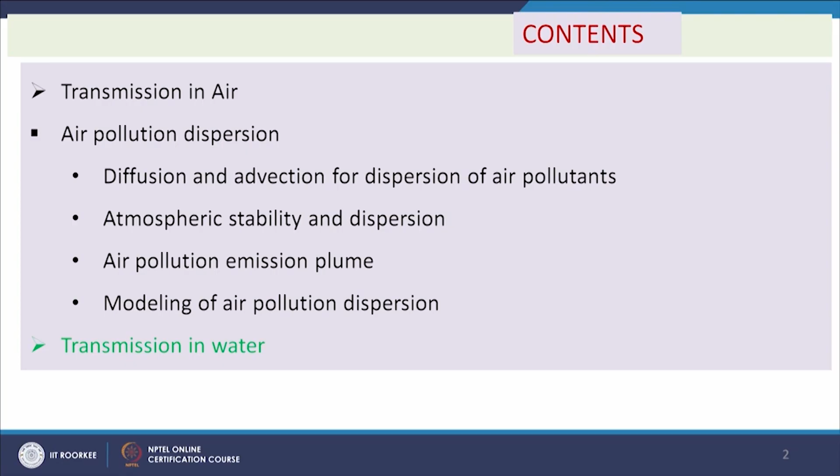So, we will be discussing now transmission in air and then air pollution dispersion: how the transmission is taking place, how the dispersion of the pollution is taking place, how the pollution is moving from one place to another in the atmosphere. Then diffusion and advection, the two major mechanisms for dispersion of air pollutants. We will also see that this process is influenced by the stability of the environment, so we will also discuss atmospheric stability and dispersion.

And air pollution emission plume. When emission enters the atmosphere through a stack, from a chimney say, how will this go downstream? Whether the plume will go up or whether it will come down. If it goes up, then there is no risk, but if it comes down, then it will be risky, and people will be more affected. So, the different types of plumes we will discuss, and modeling of air pollution dispersion.

We want to predict, say here we have an industry and pollution is generated. After 1 kilometer or 5 kilometers, what will be the concentration of pollutants in the atmosphere at a certain height? So, that we can measure. And transmission in water we will discuss in the next class.

So, we have seen that dispersion of air pollutants can take place through diffusion and advection. What is diffusion? Diffusion means pollutants are moving from one place to another due to the difference in concentration. So, the concentration gradient is the driving force for this transfer, and in case of advection the flow of wind is helping the transfer of the pollutants from one place to another. So, diffusion is movement due to concentration gradient, and advection is movement due to bulk motion of air.

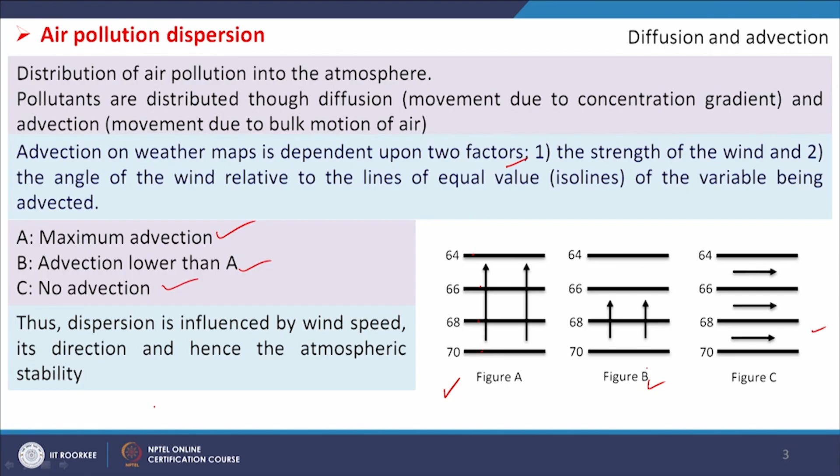So, it is clear that wind speed and wind direction will influence the mixing of the different layers of the atmosphere across the height. That is the advection we are talking about, and the dispersion is influenced by the wind speed, its direction, and hence the atmospheric stability, where stability is that which resists the upward flow. Atmospheric stability is a measure of the atmosphere's tendency to discourage or deter vertical motion, and vertical motion is directly correlated to different types of weather systems and their severity.

Okay. So, wind velocity, temperature, turbulence, humidity, rainfall etcetera influence atmospheric stability. As a result, it also influences the dispersion of pollutants. Pollutant dispersion is also influenced by the stability conditions of the atmosphere. So, there are three types of stability conditions: unstable, stable, or neutral.

So, an unstable atmosphere will enhance or encourage the vertical movement of air. So, if vertical movement is encouraged, it is unstable. A stable atmosphere will suppress the vertical motion, or it will resist the vertical motion, and a neutral atmosphere will neither suppress nor enhance vertical motion. So, these are three different atmospheric stability conditions we can get.

Now, if we assume that an air parcel is going up, okay, its inside condition is different from the outside. It may be possible that inside is becoming less cooler with height, but the outside environment is becoming more cooler. So, that is lapse rate. If we go up, temperature will decrease with the height. So, that is lapse rate. When we consider the lapse rate for the actual environment, that is environmental lapse rate,

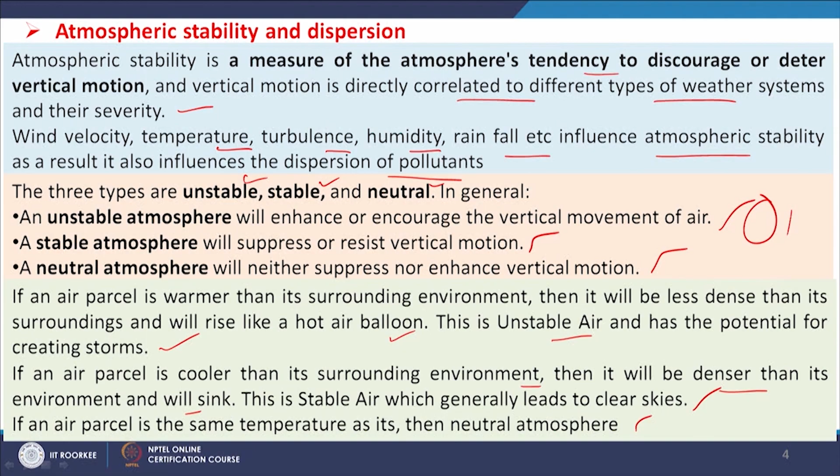And this is stable air, which generally leads to clear skies, and if an air parcel is the same temperature as its surroundings, then we get a neutral atmosphere. So, if the air parcel and outside environment both have the same lapse rate, then we will get the neutral condition. So, stability is dependent upon the dry and saturated adiabatic lapse rates and the environmental lapse rate. So, one is environmental lapse rate, another is adiabatic lapse rate.

So, adiabatic lapse rate means a balloon or parcel which is going up, we are considering it will not take any heat from the outside when it goes up. Now, that is adiabatic expansion or contraction, whatever may take place, but it will be happening in adiabatic condition. Now, the air may be dry or may be wet. So, depending upon the dry and wet conditions, we will be getting dry and saturated adiabatic lapse rates.

So, environmental lapse rate is the rate at which air temperature changes with height in the atmosphere surrounding a cloud or rising parcel of air. The overall average rate is a decrease of about 6.5 degree centigrade per kilometer, where the lapse rate of temperature is negative. As you know, as we go up, the temperature reduces, that is why negative lapse rate, and inversion is said to exist where the lapse rate of temperature is negative, that is, temperature increases with height.

The word adiabatic means that no outside heat is involved in the warming or cooling of the air parcels, as we have discussed, and dry air cools at about 10 degree centigrade per kilometer. That is the dry adiabatic lapse rate, while moist air usually cools at less than 6 degree centigrade per kilometer, that is the moist adiabatic lapse rate. So, these are the two adiabatic lapse rates we have.

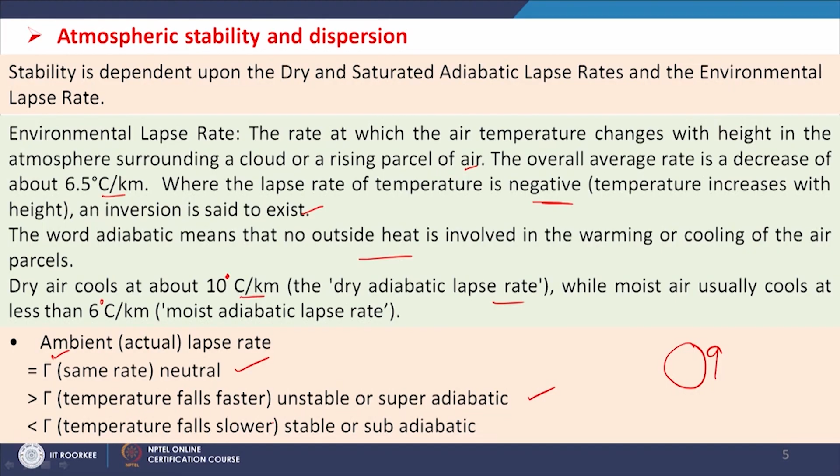Now, if the ambient lapse rate is equal to the dry adiabatic lapse rate, then it is neutral. If the ambient lapse rate is greater than the dry adiabatic lapse rate, temperature falls faster, and it is unstable or super adiabatic, and if the ambient lapse rate is less than the dry adiabatic lapse rate, it is a stable or subadiabatic condition. So, these are the different conditions by which we can quantify the environmental stability.

And because of these different stability conditions, when the gas comes out from a stack, it is dispersed in different fashions. We can get coning, looping, fanning, fumigation, and lofting.

So, what is happening in case of coning? Here this dotted line is our dry adiabatic lapse rate and the solid line is your environmental lapse rate. Both are parallel, that means the environmental lapse rate is equal to the dry adiabatic lapse rate. So there will be a neutral environment. When pollution is emitted from this stack, it will not go up nor go down. It will be uniformly distributed both ways about the center. So this is a coning type of plume, which we get when a neutral atmosphere is there.

But here the dotted line is our adiabatic lapse rate and this is our environmental lapse rate. If we consider a certain height, from 0 to this height, for the same Z we are getting more del T in case of the actual lapse rate. So del T by del Z, that is the lapse rate, is more.

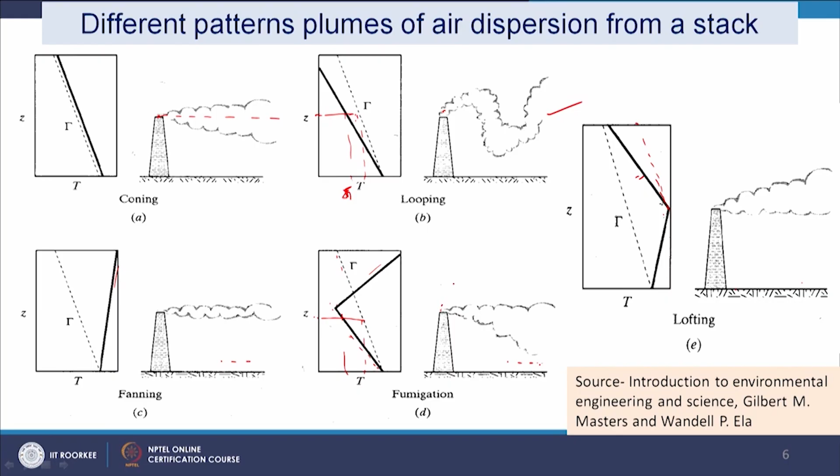Now, we will see how to model this dispersion process. The point source Gaussian plume model is mostly used. There are many approaches; people have tried to develop models to predict the concentration of pollutants at a certain distance downstream of the wind from the location of the emission. The Gaussian model is perhaps the oldest and perhaps the most commonly used model type.

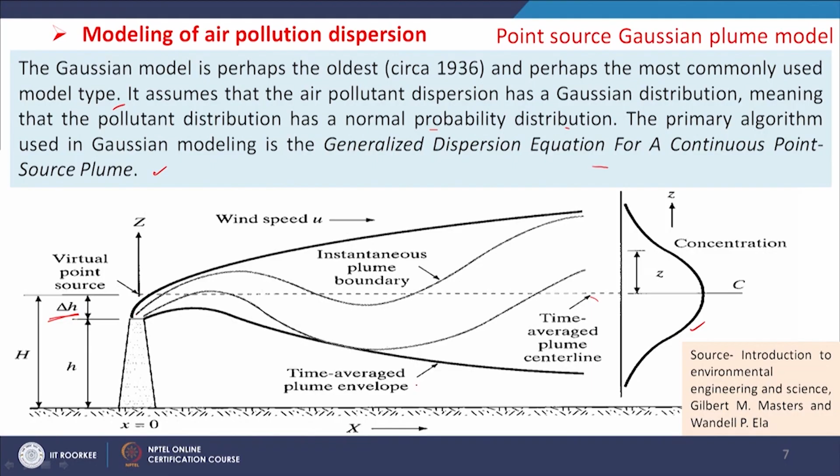This is a virtual point source and this is the center point of it, and then this is the instantaneous plume boundary, and this is wind speed, and this is the time averaged plume center line, and this is the time averaged plume envelope. So, these are the different parts to describe this Gaussian plume model. It can have x, y and z directions.

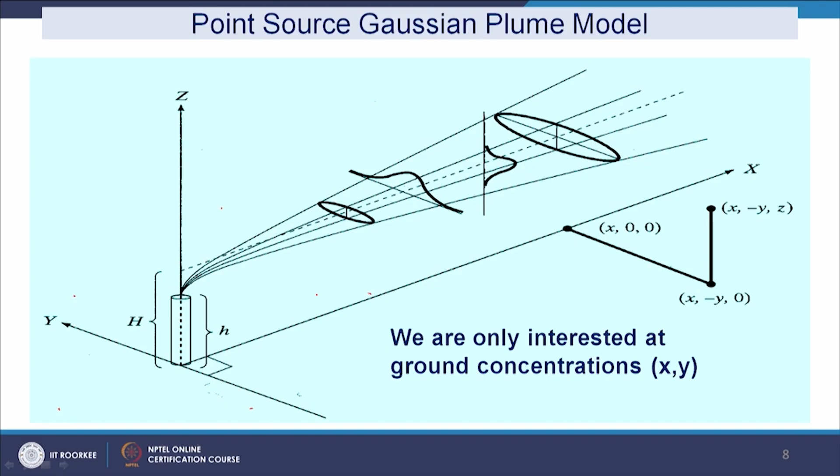We are only interested in ground concentrations, as people are here at the ground. So, if this is the point, maybe here, maybe here, anywhere the people may be. At that position x, y will change, and z we are not concerned with, because pollutants have to be available at the ground to make an impact on human health.

So, model structure and assumptions. Some assumptions are there for this: pollutants are released from a virtual point source, so that it is easy to identify, and there is a constant emission rate, not changing with time. Advective transport is by wind, and dispersive transport, that is spreading, follows normal, that is Gaussian, distributions away from the trajectory, and wind speed is constant with time and elevation.

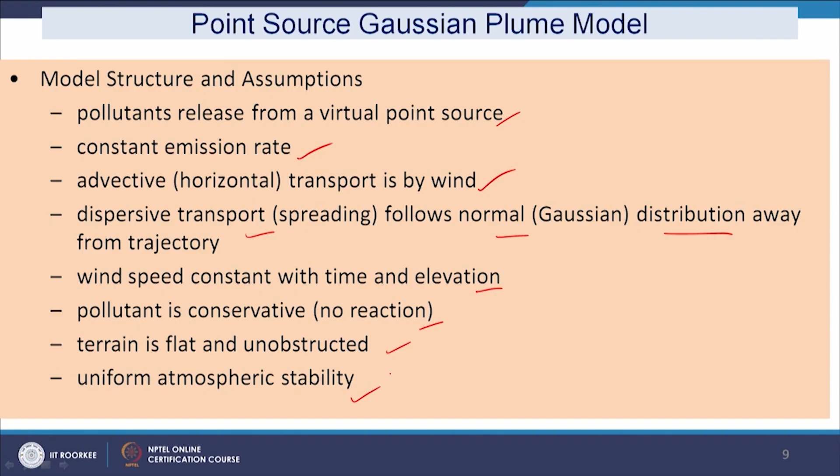The pollutant is conservative, non reactive; it is not that the pollutant is present now but after some time it will be converted to another form. We are assuming that pollutants are conservative in nature, the terrain is flat and unobstructed, and there is uniform atmospheric stability, not changing from place to place. These are the major assumptions on the basis of which the expressions have been developed.

The expression is like this: concentration at x, y position is equal to E by pi sy sz u, exponential minus half (y by sy) squared, into exponential minus half (H by sz) squared. In this expression C is the concentration at ground level at point x, y, E is the emission rate of pollutant in gram per second, sy and sz are plume dispersion standard deviations in horizontal and vertical directions respectively in meter, and U is wind speed at stack effective height.

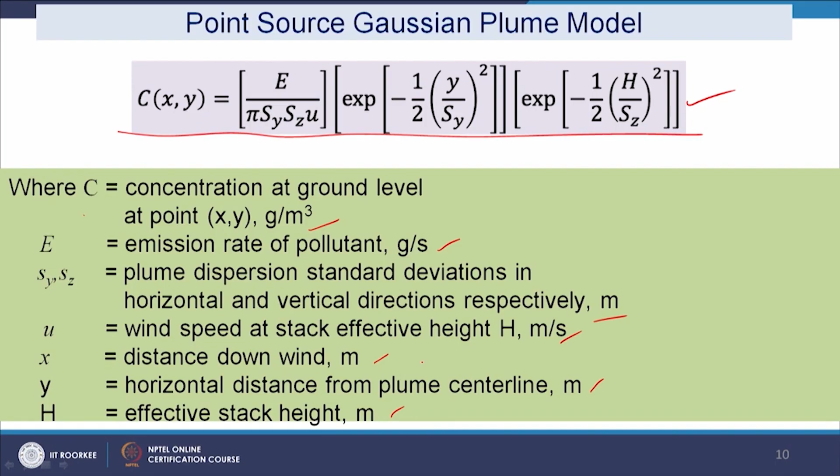At capital H, in meter per second, and x is distance downwind in meter, y is horizontal distance from plume center line in meter, and H is effective stack height in meter. These are empirical relationships, so we need to use the formula in the same units only. And to find the effective stack height, capital H is equal to small h plus del h, as we have seen in the previous slide. Here H is the effective stack height, h is the height of the physical stack and del h is the plume rise.

Holland's formula: how can we determine this del h, the plume rise? Del h is equal to Vs d by u, multiplied by 1.5 plus 2.68 into 10 to the minus 2 into P into (Ts minus Ta) by Ta into d. In this expression del h is the plume rise in meter, Vs is the stack flue gas velocity in meter per second, and d is the stack diameter at exit in meter.

U is the wind speed at the stack height and P is the pressure in kilopascal. If kilopascal, then this 10 to the minus 2 constant will be there. Ts is the stack flue gas temperature in K, and Ta is the ambient air temperature in K. So, stack temperature and ambient air temperature are Ts and Ta respectively.

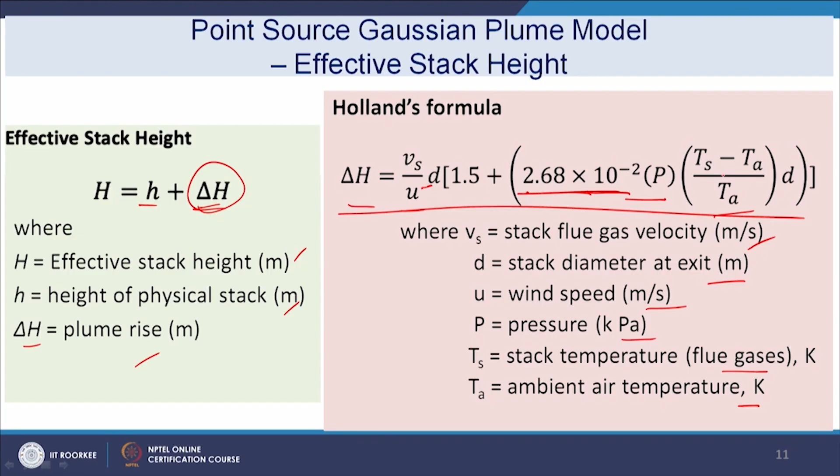So, these are the expressions to calculate the del H value. Now, the stability conditions may be of different types, and we have seen that people have worked on this area and the information is available.

So, A is extremely unstable, B is moderately unstable, C slightly unstable, D neutral, E slightly stable and F moderately stable. So, these are the different conditions which are defined, and from these stability conditions we can get the value of S y and S z, which are available in literature, as many people have worked on it and these have been accepted for applications.

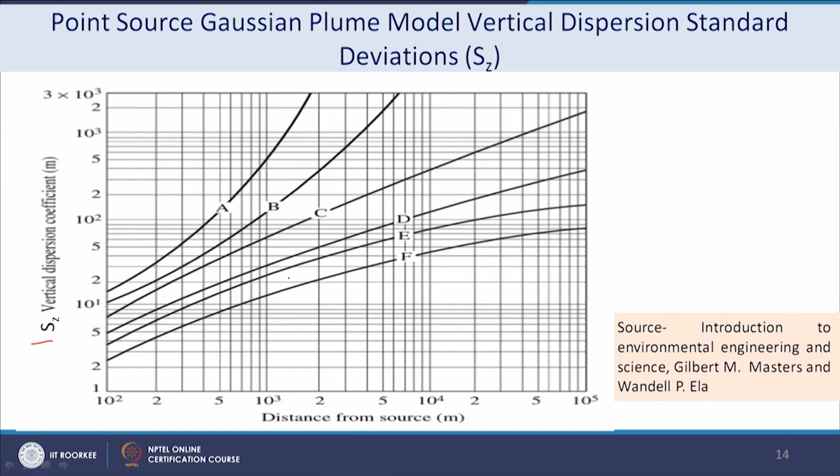So, for some distance from source, if we know the stability condition for that particular case, we will get the value of S y. Similarly, we can get the value of S z if we know the stability condition from this graph. So, these graphs are already developed by many researchers and are available for our application.

And wind speed, I told you, is at stack height, and in the table we defined u at 10 meter height. So, we have to convert it to stack height. So, u 2 is equal to u 1 into z 2 by z 1 to the power p. This is the expression used to calculate the wind speed at stack height. At 10 meter height we know it, but at stack height it will be determined by this formula, and in this case the p value will depend on the stability conditions.

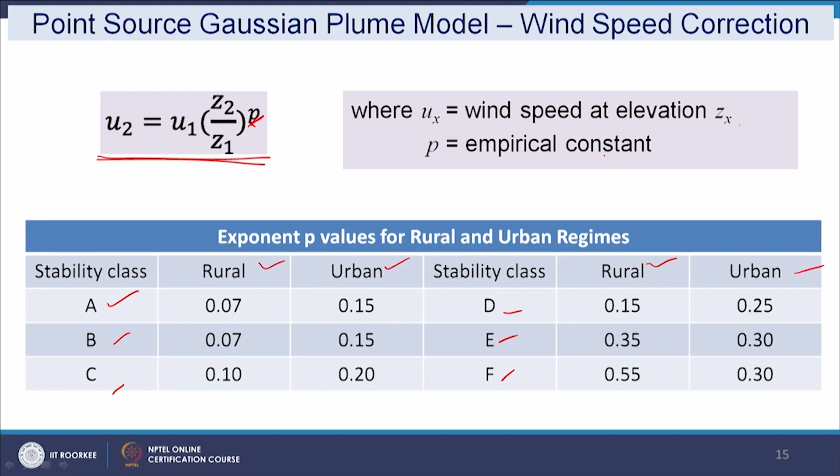If we see here, we have stability class A, B, C, D, E, F and it may be rural area or urban area. So, depending upon this area, these values are defined; on the basis of experience these p values have been recommended for prediction, that is wind speed correction. And here u x, that is u 1, u 2 you have shown. So, u x in general terms is wind speed at elevation z x and p is the empirical constant. This p will be used to determine the value of u 2.

Now, for example, a stack in an urban area is emitting 80 gram per second of NO. It has an effective stack height of 100 meter. The wind speed is 4 meter per second at 10 meter. It is a clear summer day with the sun nearly overhead. Estimate the ground level concentration at 2 kilometer downwind on the center line and 2 kilometer downwind 0.1 kilometer off the center line. So, x and y values are given in case 2, and in case 1 no y value is given.

So, what will be the first step? We have to determine the stability class. So, how can we determine the stability class? For that, I have shown you a table where the wind speed at 10 meter height is important. In our case 4 meter per second at 10 meter height is given. So, we will consider the wind speed is 4 meter per second at ground surface. It is a clear summer day with sun nearly overhead, that means daytime and strong sunshine.

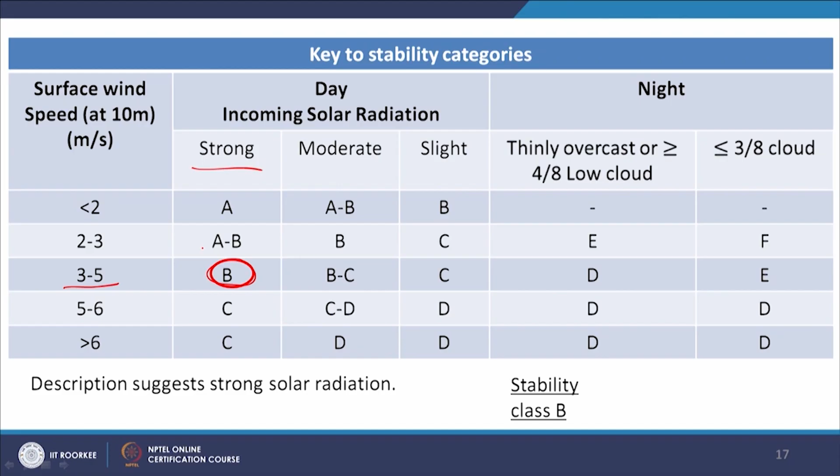So, if we see this table, 4 meter per second falls in 3 to 5, and we have strong solar radiation, because it is the middle of the day and a clear day. So, this will be B type of stability, and if it is B type of stability, then what will be our job? Our job will be to find out the value of p. So, for p we have another table we have discussed.

So, in this case we are having B. So, B will be having P equal to 0.15. So, in this case if we put this value to get the value of wind speed at our stack height, then U2 will be U1 into Z2 by Z1 to the power P, where U1 is 4 and Z2 is how much? It is given 100 meter effective stack height. So, we do not need to calculate the effective stack height, it is already given: physical stack height plus plume rise. So, that is given as 100 meter.

So, we do not need that formula to determine the value of del H and then add it with h to get H equal to small h plus del H; that is not needed. So, we are directly getting the value of P, and then we will be putting this P value here. Z2 value is given 100 and this is 10, to the power 0.15. So, it is becoming 5.65 meter per second. So, this is the wind speed.

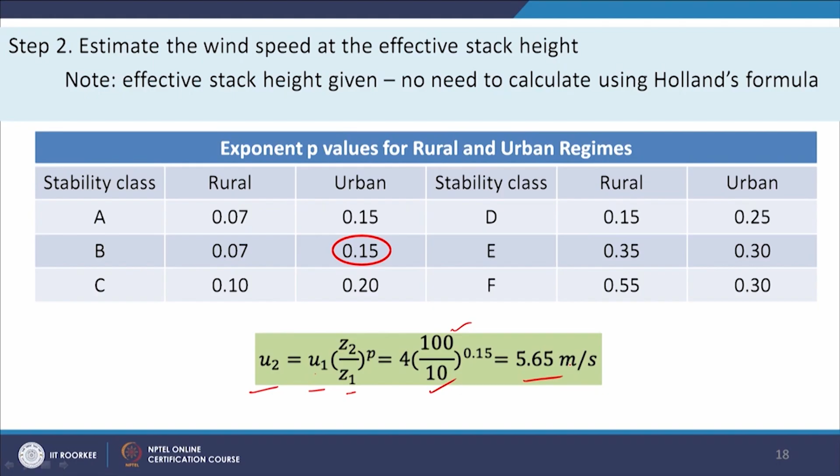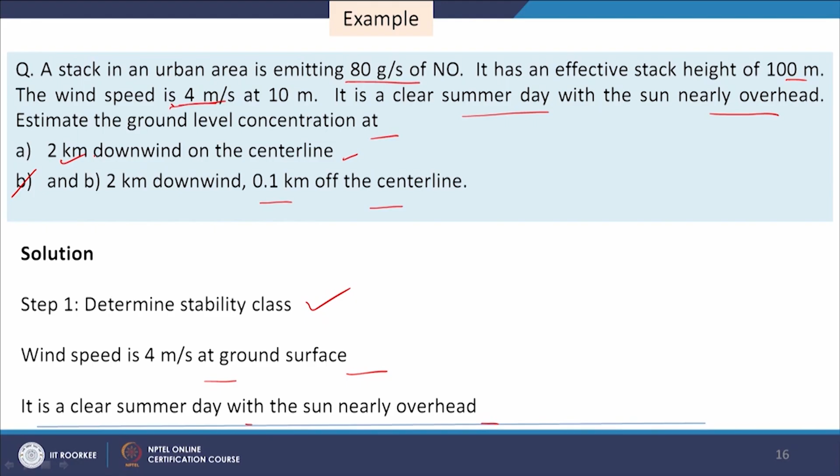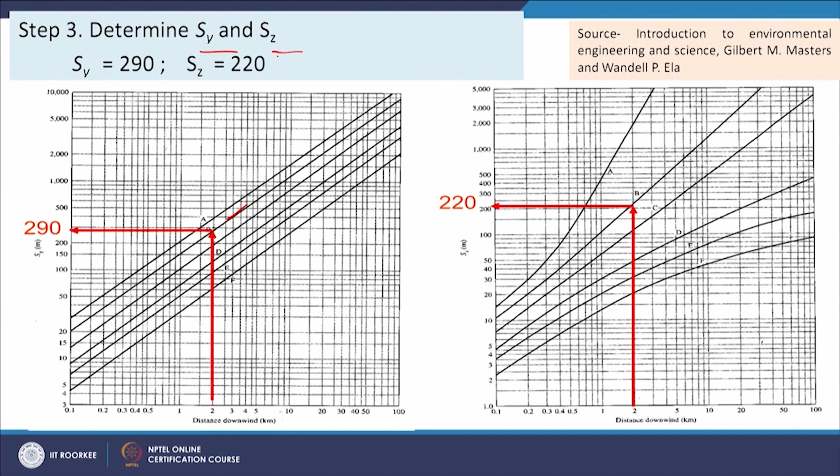So, this is our S y, because this is downwind distance 2 kilometer and the S y value is at this point. So, 290 we are getting. Similarly, for S z we are having 2 kilometer, we will go here for B type of stability and we are getting 220. So, S y and S z values we are getting that way, S y 290, S z 220. Then we will put in the values.

We have the formula C(x, y) equal to E by pi S y S z u, exponential minus half y by S y squared, into exponential minus half H by S z squared. So, in this case E is equal to 80 gram per second, pi value we know, 290 S y and 220 S z we have calculated, 5.6 u we have calculated, and then y value is 0 in this case, because it is only 2 kilometer downwind on the center line. The offset from the center line is not given. So, y equal to 0.

And height is equal to 100 divided by 220, squared. So, this expression gives the concentration at 2 kilometer away, that is x equal to 2000 and y equal to 0. By simplifying we are getting 6.43 into 10 to the power minus 5 gram per meter cube, or 64.3 microgram per meter cube. So, this is the concentration at 2 kilometer downwind. In the second case we have to find it for 2 kilometer downwind and 0.1 kilometer off the center line. So, we have x equal to 2000, y equal to 0.1 kilometer, that is 100 meter.

So, we are getting the concentration C(2000, 100) equal to 80 divided by pi into 290 into 220 into 5.6, into exponential minus half of y, which is not 0 now; y is 0.1 kilometer, that is 100 meter. So, we will put 100 meter by 290, squared, and exponential again with height also 100, so 100 by 220 squared. By simplification of this expression we get C(2000, 100) equal to 6.06 into 10 to the power minus 5 gram per meter cube, that is 60.6 microgram per meter cube. So, now we are able to determine the concentration at these two locations.